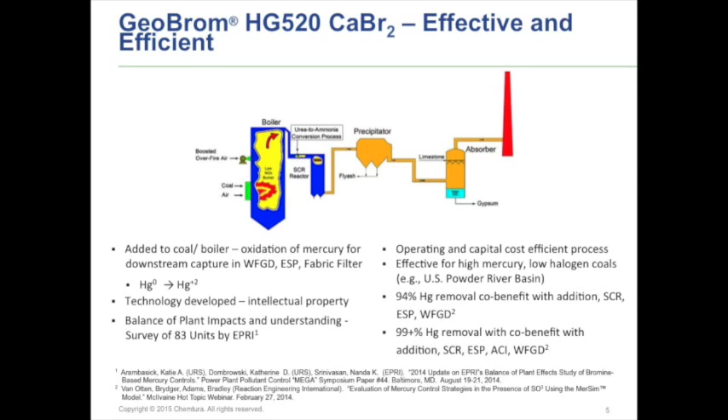The bromine, I think most people are familiar, but I'll go through it fairly quickly. The bromine is added either onto the coal or into the boiler for the most part. It can be added in different parts of the system. Again, the focus is to oxidize mercury, to get it in a form that can be captured downstream. There are technologies that have been developed. There's intellectual property out there. I encourage everyone to look at that and make sure you're following all intellectual property restrictions.

And then EPRI has done a survey as well, and I'll give you a little more detail on that later. This is an operating and capital cost-effective way of doing it. And for the most part, you are doing this when you're using coals that have lower halogen content. So you're adding the halogen where it's not already present. And there have been some studies done looking at the efficiencies, which are quite good.

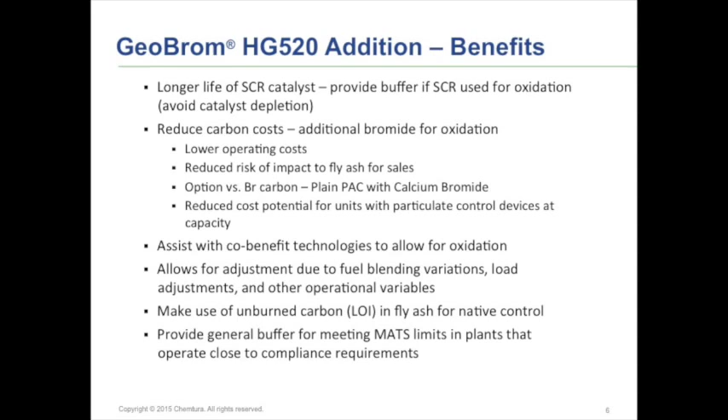When you look at our product, which is GeoBrom, which is a calcium bromide product, what are some of the benefits? Number one, if you're using an SCR, getting oxidation through an SCR, having that bromide takes a little bit of that burden off your SCR. You can reduce some of your carbon costs. So if you're using a brominated carbon, using a combination of calcium bromide with a plain carbon may be a better operating cost idea for you.

It may allow you to use less carbon, which would reduce the risk of fly ash. If you're selling fly ash in the market, it would reduce the risk of that becoming an issue. And then also, if you have particulate control devices that are fairly loaded, this would help reduce carbon use. Lower carbon use would help reduce having to do much more to expand the capacities of your particulate devices.

If you're using other co-benefit technologies, having that little bit of extra oxidation will help you as far as capture downstream. So if you are on the borderline or you do a lot of things to change your plant, whether it's fuel blending, whether it's how you operate, load, everything, it gives you some flexibility to make sure that you're still in compliance with the MATS regulation.

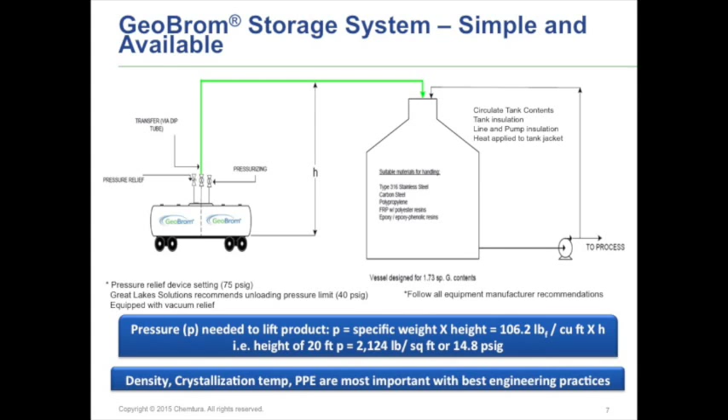The systems for calcium bromide are fairly simple, and the equipment is basically out there. A lot of the equipment you can use, like lined FRP tanks. The big things you have to remember with calcium bromide in particular is the density, the crystallization point issues with that, the temperatures. But all of that can be dealt with fairly simply. You can transfer by pumps, you can transfer with pressure. You've got a lot of tools available to you to deal with these systems. Again, the big thing there is density and crystallization temperature.

If you're in a colder area, the rule of thumb is as long as you're staying about 10 degrees above that crystallization point for your normal conditions, you're going to be all right. But you could install a recirculation line to help with that, or if you need it even in very extreme conditions, a heat exchanger, a small one that would provide a little bit of heat input as well.

Looking at the balance of plant and corrosion studies, which is the next part here, again, a quick summary of the work that EPRI has done, and many of you probably have seen it at other conferences. I've got the references at the bottom. But for the most part, they looked at a number of units. Out of the 83 they looked at, 14 were only really doing parametric testing, so they pulled those out and looked at the other 69.

And of those 69 units, 45 were basically Section 45 units for Section 45 tax credits. 19 were meeting state or other regulations, and then 5 were being used in a combination. So a lot of what's been done with bromide at this point has been driven, obviously, based on the timing of MATS from the Section 45 perspective.

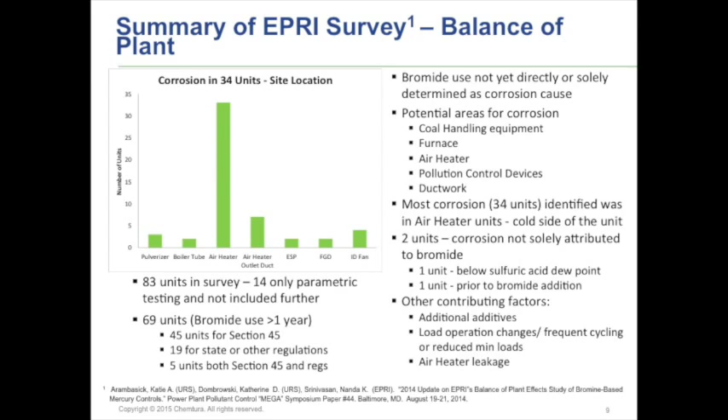Basically, they really haven't come to any hardcore conclusions yet to say bromide is or isn't the issue at this point. There's a lot of things going on within a lot of these plants. They did look at all the potential areas of concern, which would be the coal handling, the furnace, the air heater, the other pollution control devices, and the ductwork as well. Most of the corrosion, as you can see, is in the air heater. And that's where you're getting your temperature changes, where you have the potential to have acids and things condensing out.

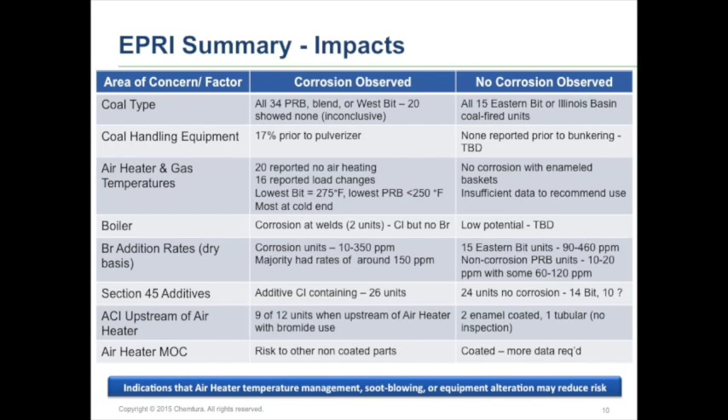And there were 2 units actually in the study where the corrosion was not solely attributed to bromide. One of them was already operating below sulfuric acid dew points, so they knew that was going to be a concern. And another one, prior to the bromide addition, they were already seeing some corrosion as well. There are other contributing factors with the Section 45 units. They also had another additive that contains chloride that could be contributing as well. And when you look at things like air heater leakage or your load swings, there are other issues that are going to increase your risk of temperature changes that could lead to acid condensing.

They tried to break down the data that they had of the survey to see are there any smoking guns as far as what could be causing the problem. One of the things they looked at was coal type, and basically where they did observe corrosion, they were all PRB units. Now there were some PRB units that did not exhibit corrosion, but for the most part where they saw corrosion, these were mostly PRB, low halogen coals. The ones where they didn't were basically all eastern bituminous or Illinois basin, so higher units.

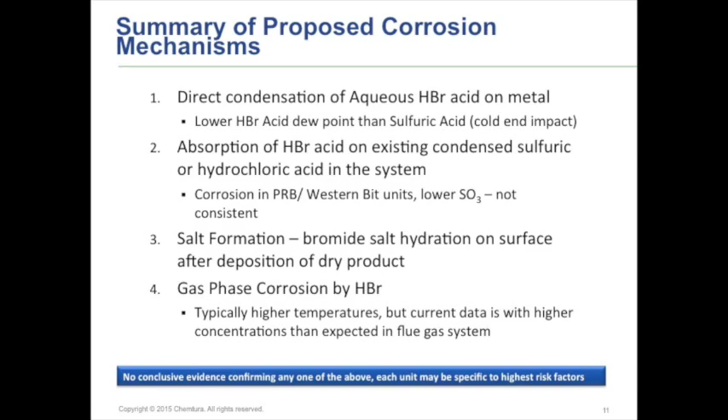The thought there maybe is that if you're already dealing with the acid problems because of your higher halogen coals, then you're maybe a little safer than when you're operating with low acid coal. With the coal handling equipment, pretty much nothing really was observed prior to bunkering, and a very small percentage was when they were adding it to the pulverizer.

The air heater, again, this is where most of the corrosion was demonstrated. Most of it was at the cold end. So again, the question there is what's going on with the operation of the unit as far as temperature. But basically, the other part of that they found was that there really was no corrosion exhibited when they used enameled baskets. Now, they didn't have enough data to really recommend using that, but with our experience as well, dealing with hydrobromic acid and other materials that are corrosive, as long as you do have a reliable coating that's being used in the right application, that will help with corrosion issues.

At the boiler, really didn't see any problems there. You wouldn't really, at those temperatures, necessarily expect to. But where they did see a couple weld issues, it was analyzed that chloride was there, not bromine. So in that particular instance where they did see that, they saw chloride present.

When you look at the bromine additive rates, this is one that was, again, kind of a mixed bag of information. They saw that the loading, for the most part, didn't really come in line with what you would expect, that higher was worse and lower was better. And then again, when you looked at some of the very high rates of the higher halogen coals, that was less of an issue, where they did not demonstrate corrosion. So the jury is still kind of out on that one.

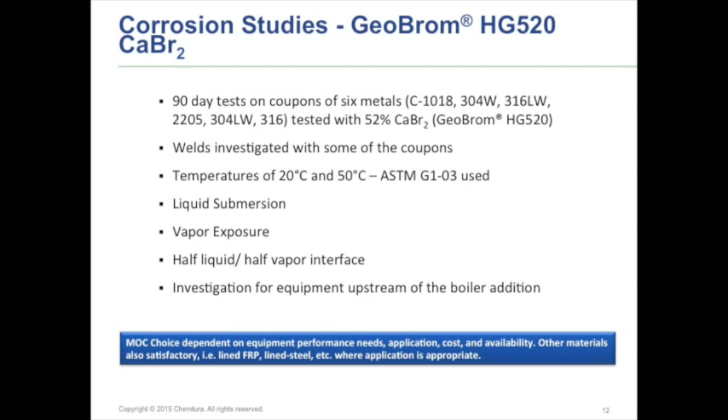The corrosion mechanisms you're looking at here is either direct condensation of hydrobromic acid on the surface, or you potentially have hydrobromic acid contributing where you've already got sulfuric or hydrofluoric acid condensing. And then you have salt formation where you could have a situation in changing loading where you have a higher temperature and a lower temperature, and then you get some salt to precipitate out on the surface. Then you could also have the gas corrosion of HBr. Typically, you really need much higher temperatures than where we were seeing corrosion here.

That's kind of the summary on the EPRI piece of it. The corrosion studies we did working with EPRI were focused more on the handling equipment, handling calcium bromide, and what you would need to do as far as introducing it into the system. We did 90-day tests. We did look at welds. We looked at basically carbon steel, stainless steel, and some duplex. And then we looked at just liquid submersion, just vapor, and then a mixture to see if you get anything involved with the surface. And again, this is all based on materials of construction for the right application here.

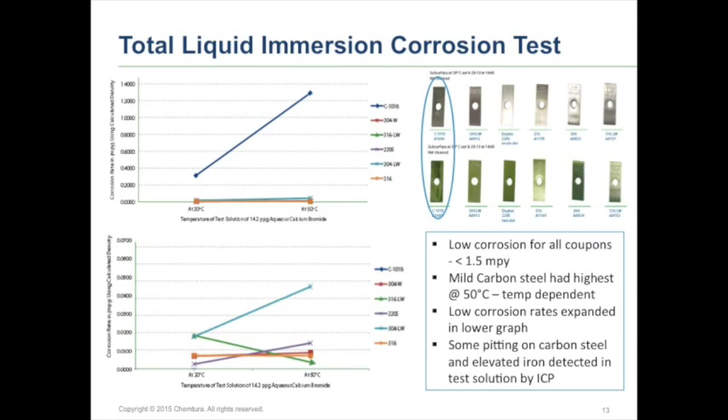But for the most part, when you look at the corrosion, the total liquid test here, the carbon steel was the one that really demonstrated the most issue. And even so, that's still around 1.5 mils per year as far as corrosion. So still fairly low in most cases. When you break out this lower piece here to the bottom graph, you can see that these are all still very low corrosion rates. Definitely with a little bit of temperature, as you would expect, you get a little higher corrosion rate.

And then the surface impact here, I know that's probably a little bit difficult to see, but for the most part, the carbon steel was the only one that really demonstrated any kind of major pitting or any other corrosion evidence.

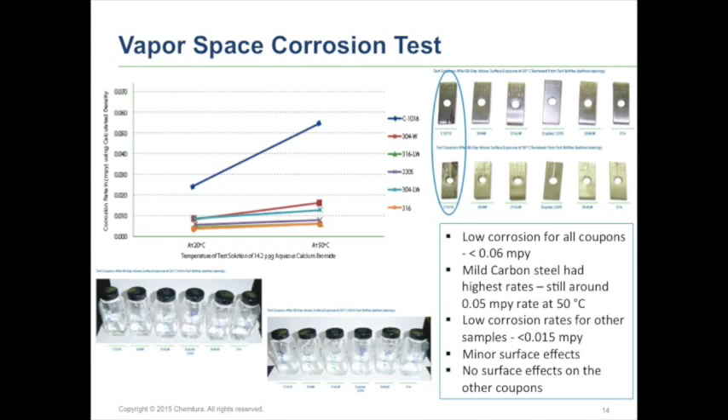Looking at the vapor space, this is basically no corrosion whatsoever. These limits are incredibly low across the board, even for carbon steel. The solutions picked up absolutely no color, and all the coupons for the most part look very clean. So when you're looking at the vapor space, it's really not the vapor at these temperatures that you're having issues with. You're not creating a lot of HBr or something out of the solution that's going to impact where the vapor is coming in contact with the metal.

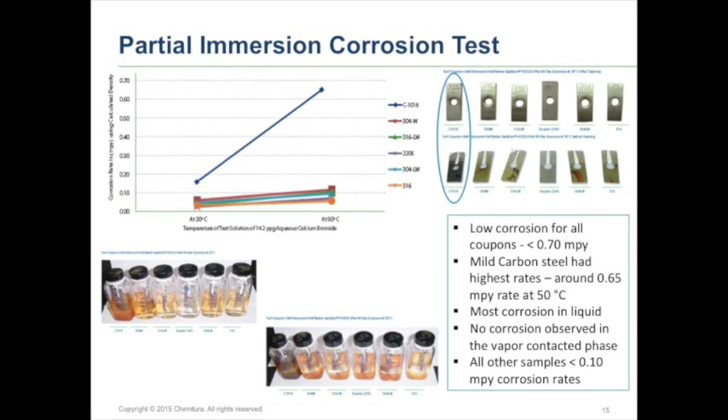You can see that there was some pitting and some evidence on the surfaces, but for the most part, the duplex and the stainless steel all performed very well, and even the carbon steel, given the application, did fairly well.

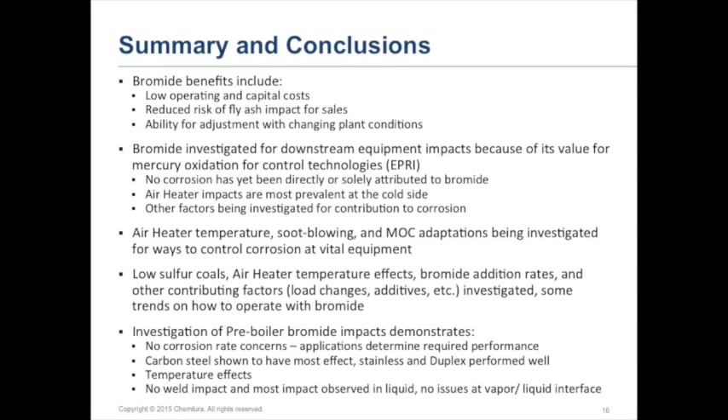Air heater temperature is a big focus, and soot blowing if you're adding carbon upstream, as well as enamelling your baskets to do some things around the materials of construction, could also help with any issues you might see. And again, the work we've done looking at calcium bromide with the systems you'd be using to handle it has not really demonstrated much impact as far as any kind of significant corrosion rates. Again, very much dependent upon your application and how you're using that piece of equipment, though nothing really significant.

So for the most part, that's all I have. If you'd like to see the hardcore data, there's much more detail in our brochures, and you can use that further as you plan for MATS. Any questions?